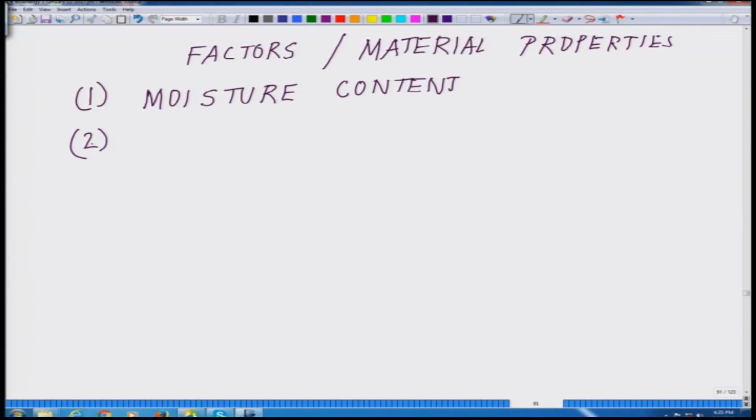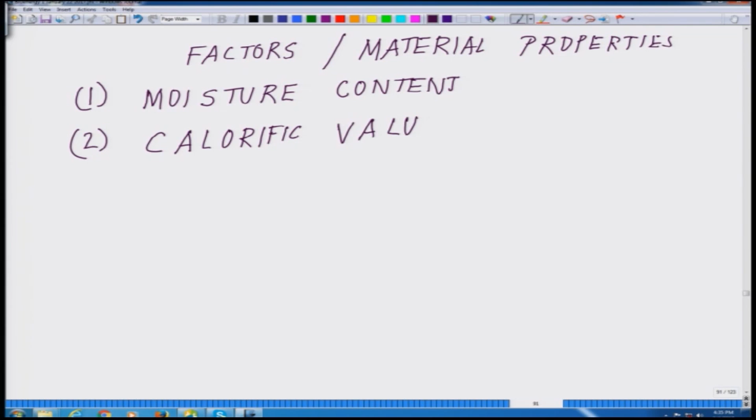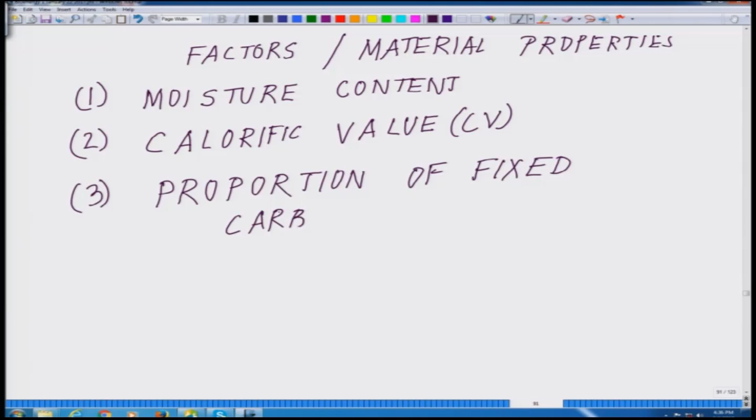Okay. As we promised, we will first enumerate all the points. Next important thing is the calorific value, which in short is also called CV. Then we have the proportion of fixed carbon versus the volatiles in any sample. Proportion of fixed carbons versus the volatiles.

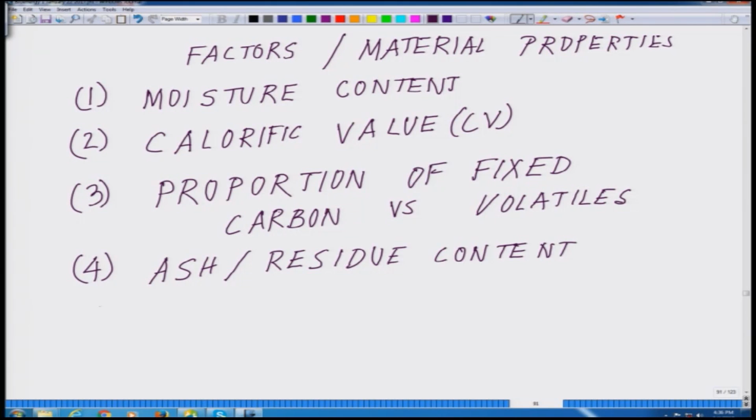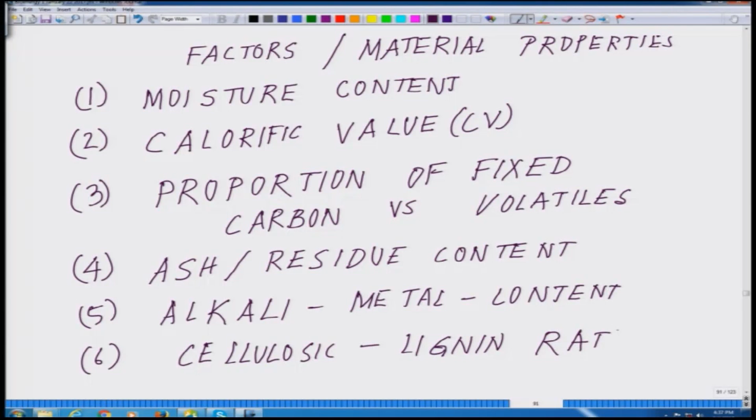Okay. Then there is a fourth factor which we call ash slash residue content. How much ash is being produced, and these are all linked to the carbon level and the volatiles content. Fifth factor is alkali metal content, and here specifically we will talk about the role of silica. And the last important feature is what we have already discussed; we will briefly try to pick up those points which we may have missed, cellulose to lignin ratio. Okay. So, these are the 6 critical features which eventually determine how much energy you can derive from the material.

So, let us get an understanding of this water content concept. What really is water content? There are 2 levels of water. One is called intrinsic water, the other one is called extrinsic water. Intrinsic water is that small amount of internal water which is inherent in the material. In other words, the material is made up of proteins, carbohydrates, lipids. In between them there are a lot of water molecules which wobble around them, and it is that minimum amount of water that helps these biomolecules to function. So, that is called the intrinsic water.

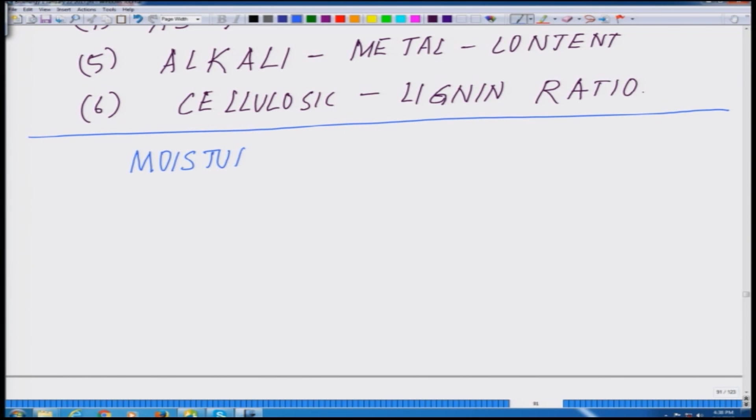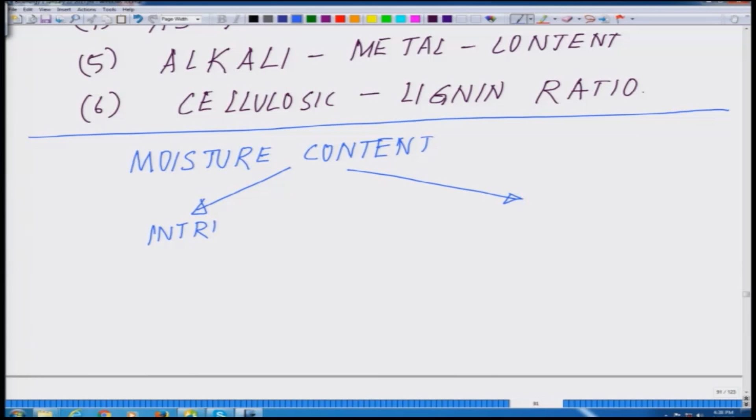So, let us get back to the slide and start jotting down those points. Now what we will be talking about is the water, moisture content or water content. Moisture content falls under two headings. The first one is intrinsic, the other one is extrinsic. Intrinsic water has no influence from the weather condition. That bare minimum of water is essential for that biomolecule or for that system to function.

Contrary to that, there is something called extrinsic water. Extrinsic water is a function of the environment. Say for example, you are harvesting a crop in the Kharif season or in the rainy season. In those seasons, the crops will have more water in them. Or when you have harvested the crop, there is a rainfall. They may pick up that moisture, and moisture plays a role in determining what kind of conversion strategy we have to follow.

You must recall a couple of lectures before, we talked about it, that there are certain plants which, because of higher moisture content, could only be processed by fermentation or the biochemical route. Whereas at a lesser water content, you can use the direct heating technique or chemical degradation techniques, but that solely depends on the water content.

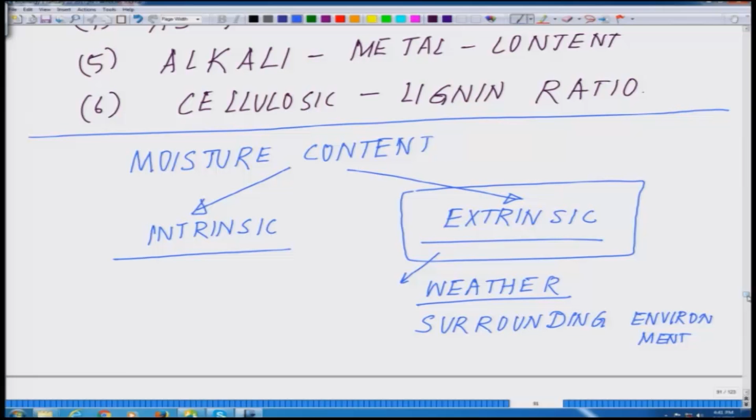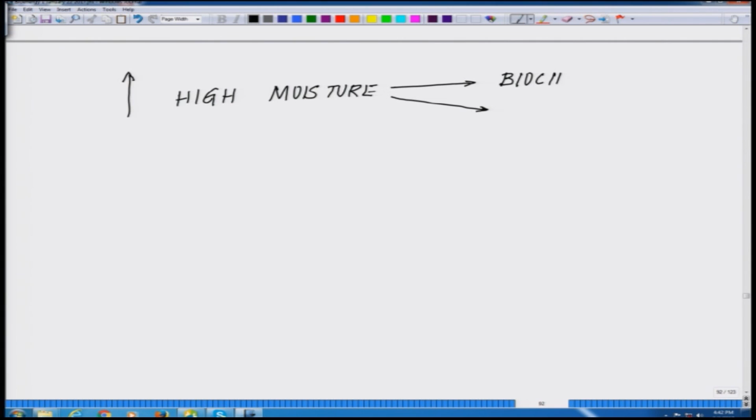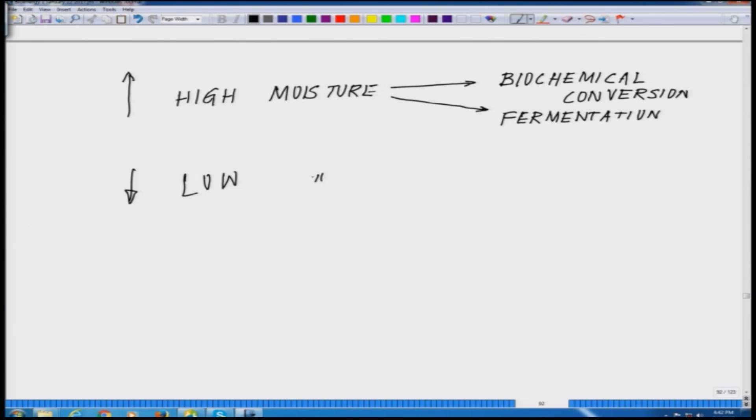Now, I will draw a table for you as an example to understand this fact. But before I put the table, there is something I mentioned which I wanted to highlight here. Say you have a high moisture sample. This high moisture sample is generally suitable for conversion either through the biochemical conversion route or the fermentation route. Contrary to that, if you have a low moisture content, such a sample goes through a thermal route.

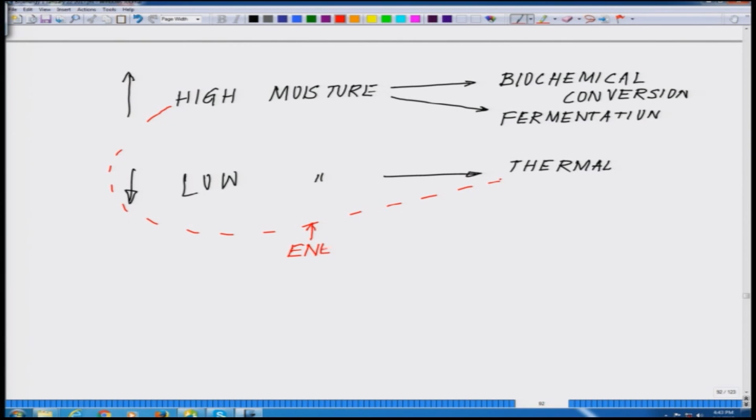That does not mean that you cannot use a high moisture sample for the thermal route. Of course you can do so, but the energy consumption here will be fairly high. Energy expenses will be prohibitive. In other words, you will have to spend a whole lot more energy to transform a high moisture sample by the thermal conversion route. Once we come to the classification of different conversion routes, it will be clear to you, but from your basic understanding you can visualize that it has more water, so you may prefer to go through a fermentation route where it converts into alcohol and so on. So this is the energy expensive, prohibitive route.

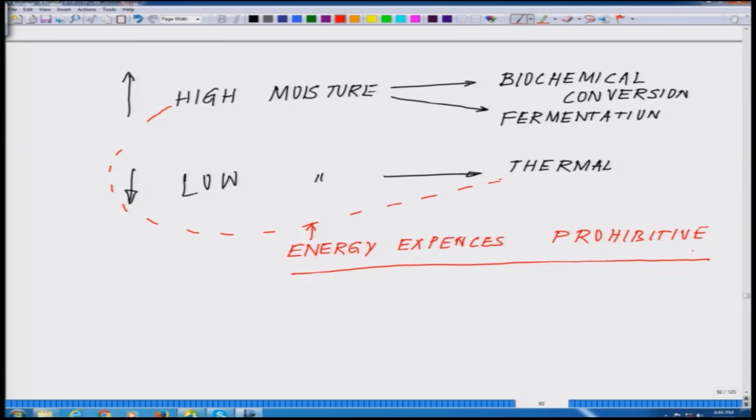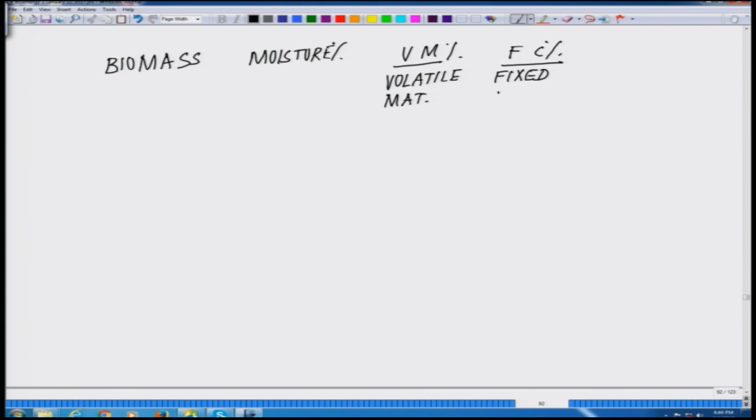Now, I was talking to you about the table. So let us draw tables for your better understanding. You have the biomass. We put the columns: moisture percentage, then the volatile material, VM, and just put MAT for material. Then you have FC percentage. Please get used to these terminologies. It is called fixed carbon percentage. Then you have ash percentage.

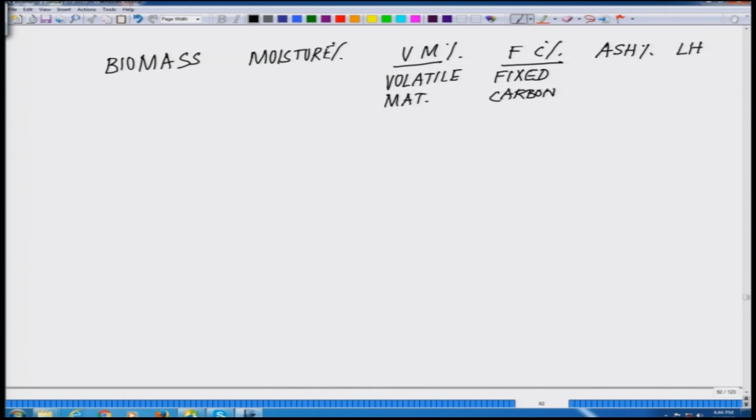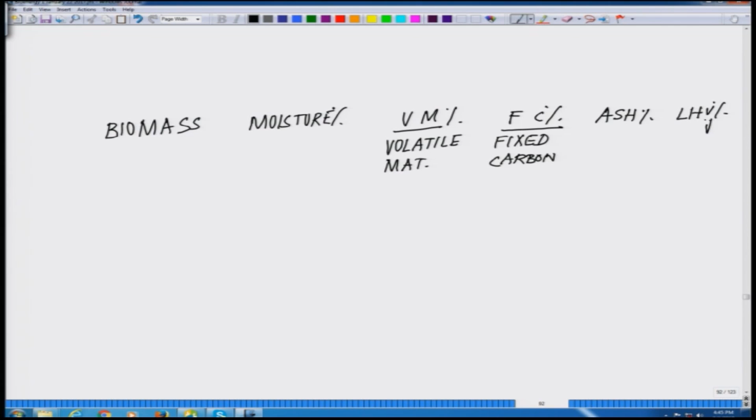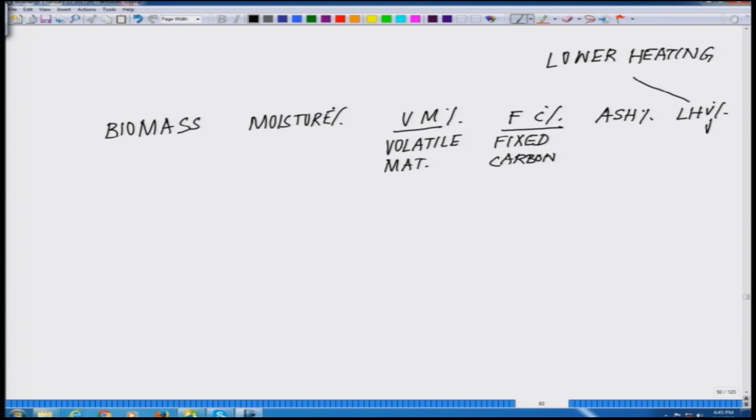And then there is another terminology which will come next, in the calorific value, which is called LHV percentage. LHV is lower heating value. We will come to that: what is the meaning of lower heating value, what is fixed carbon, and all those things. Now, let us do a comparison, and this table will come in very handy in the calorific value. Say we compare wood and wheat straw.

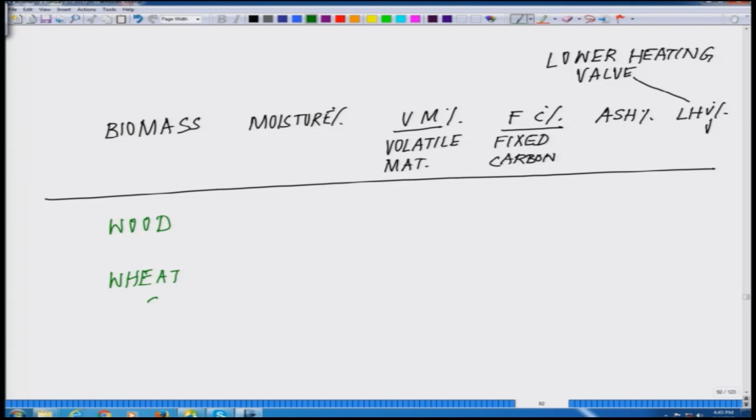So, what you will see is that in the wood essentially there will be 20% moisture, whereas in the wheat straw you will have 16% moisture. So, the first comparison. In terms of volatile matter, see the difference. 82% volatile material, whereas in the wheat you have only 59% volatile material. Contrary to it, fixed carbon here is 17%, whereas fixed carbon here is 21%. Okay? And the ash is 1%, whereas here ash is 4%, and lower heating value is 18.6, whereas 17.3.

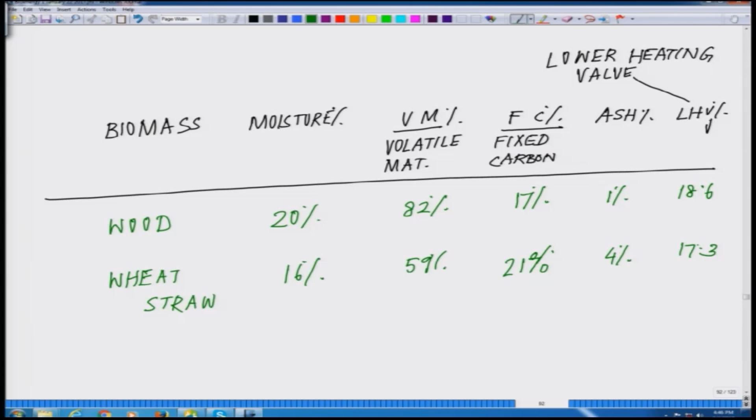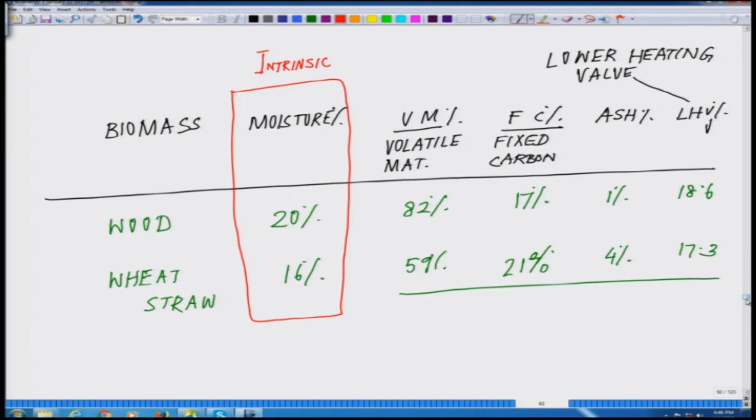Just at this stage, do not worry about this part of the table. Just concentrate out here. This value is very critical, and this value, what is being reported in any literature, is intrinsic value. So, always remember these kind of tables, when they talk about the intrinsic value, they do not talk about the extrinsic value. Okay? So, that is the reason why I put that table in front of you.

Now, coming back, so this is what all you needed to know about the water content. After the water content, we will talk about the calorific value, the phase 2 of it. So, this is the second parameter which is very important for us. So, coming back to the slide, so this is B, which is our calorific value, which is also, as I told you, denoted by CV, calorific value.

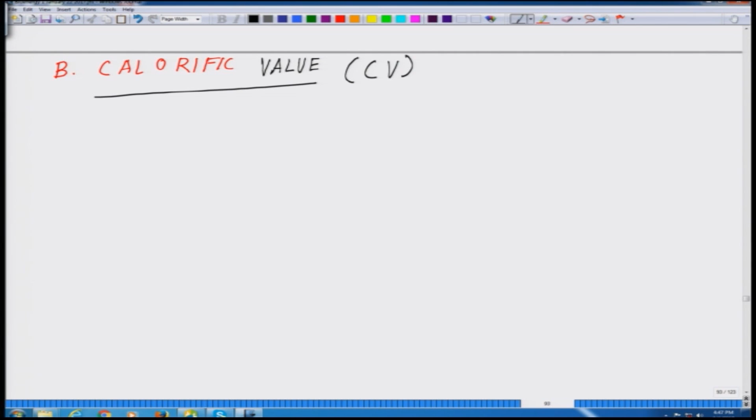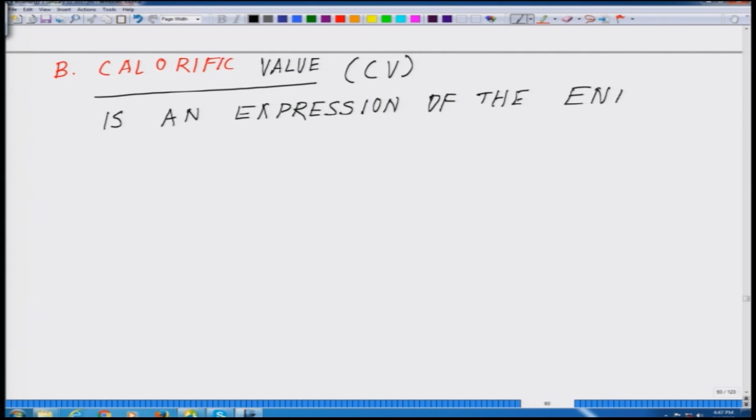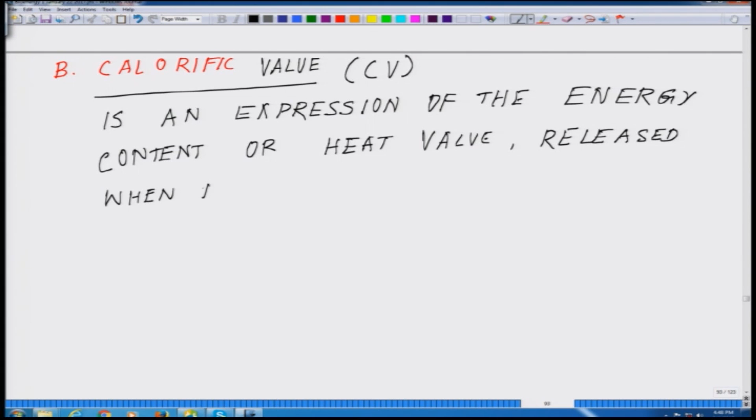So, calorific value is an expression of the energy content, or it is also a heat value, since it is in calorie, heat value released when burnt in air. When burnt in air. So, this is another part to remember when you are burning it in air.

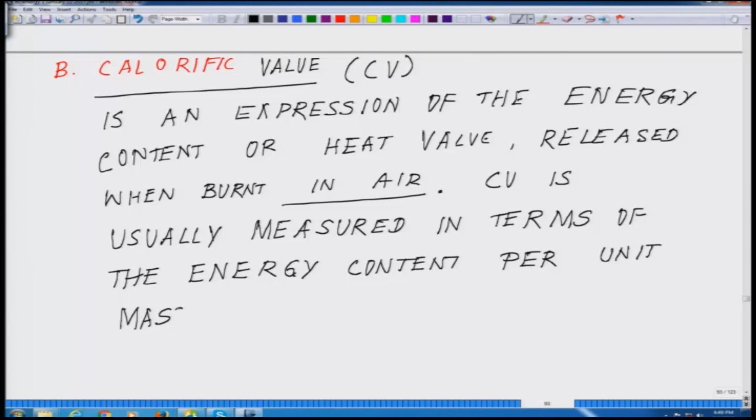CV is usually measured in terms of, now you remember in the very first class, the first phase of the lectures, I told you about all the units which will be essential, in terms of the energy content per unit mass, or sometimes volume, because when you are calculating it for any kind of liquid.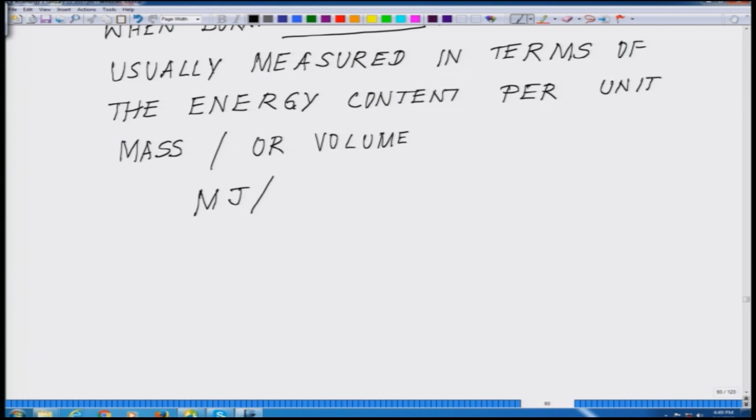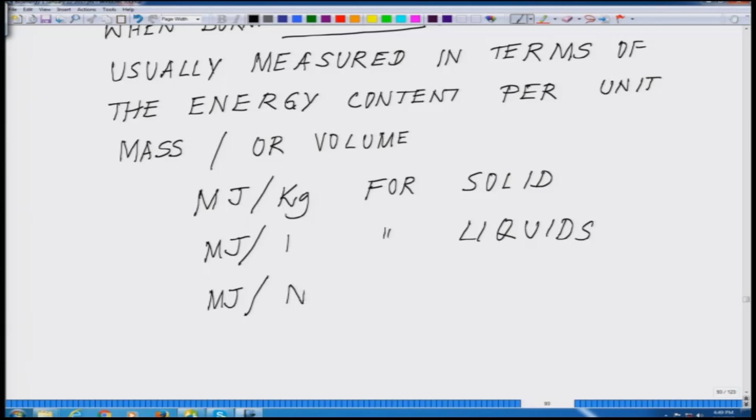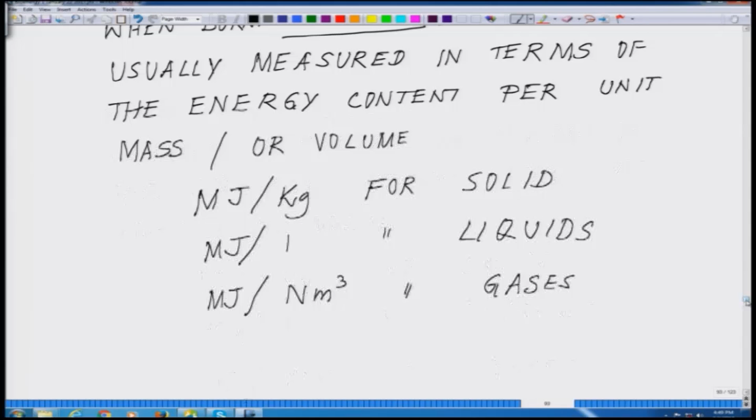Hence, the unit is megajoule per kilogram for solid, megajoule per liter for liquids, and megajoule per normal meter cube for gases. So, this is the unit which is being used, and CV can be expressed in two ways. Just like water content, intrinsic and extrinsic, CV can be expressed in two processes. One is called gross calorific value, GCV.

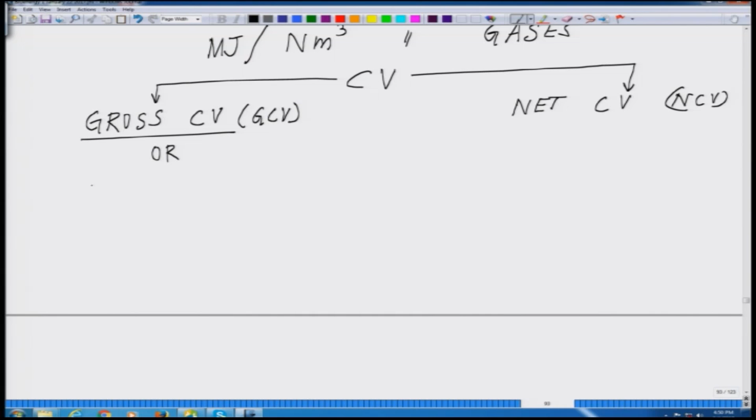The other one is called net CV, NCV. Gross is also called higher heating value, HHV, whereas the net calorific value is also called lower. Now, you remember where this word came from, lower heating value, LHV. Now, what is the difference between the two?

So, to explain you the difference, it is something like this. Whenever we calculate the calorific value, we take into account the latent heat of the water vapor. What does that mean? Say for example, I have a sample, and I want to measure the calorific value of this stuff. So, there are a lot of water molecules inside it, right.

So, if you remember, in the last class I was telling, what are we really deriving? We are deriving the breaking of the bonds between carbon, hydrogen, oxygen, and so on and so forth. Wherever there is a bond, we are breaking the bond. While we are breaking the bond, we are pulling two things apart. It is liberating an energy, and that is the energy what we are using, right.

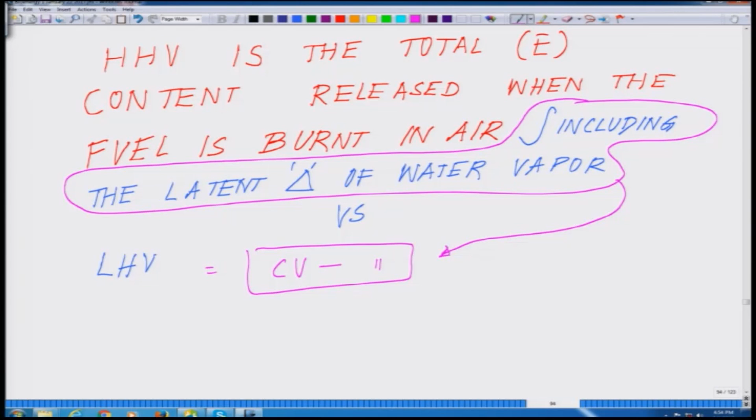Now, latent heat, I am just putting as a triangle, of water vapor. Now, versus when we talk about the next one, which is lower heating value, what you are getting rid of in the lower heating value is this part. This is the part which is not included in the lower heating value. Okay. So, calorific value minus the latent heat is what makes it the lower heating value. So, essentially this is the more practical term, more practically used for all this kind of situation. Okay.

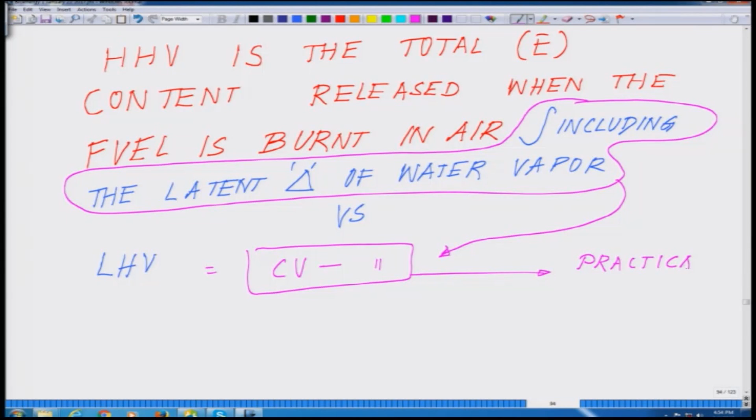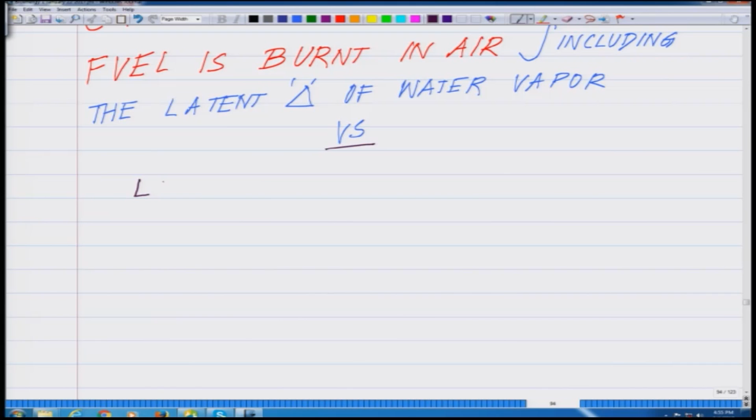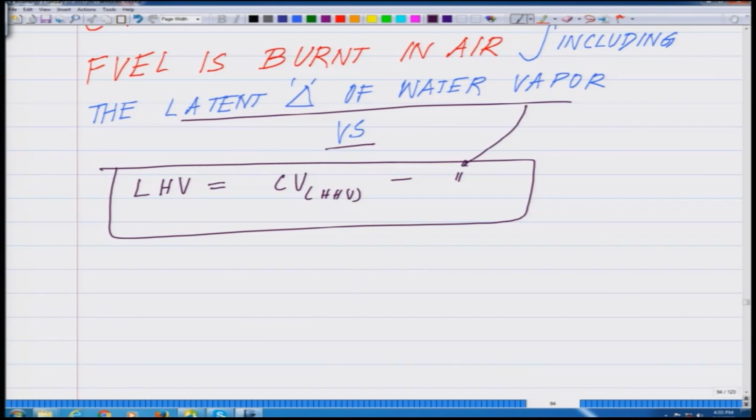Your LHV is equal to the CV, which is calculated for HHV, higher heating value, minus this value. Okay. And this is what is more practically used. So, wherever you see HHV, LHV, do not get confused, because it is a very simple concept. So, I believe this concept is clear to you. So, you are removing the water vapor, and then what you are getting is the real value.

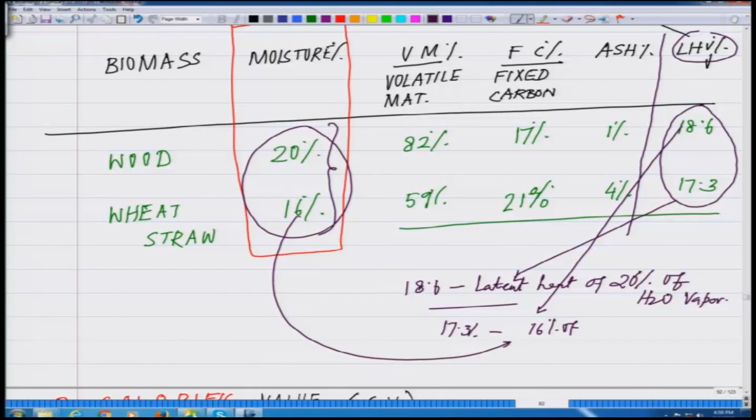Okay. So what we realize is that from the gross calorific value GCV, you have to remove the percentage latent heat given out by the water vapor. That value has to be reduced, and then what you get is the LHV value. So that was one small mistake I did, because I didn't keep an eye that that was an LHV value. So if it would have been an HHV value, or the gross calorific value, then from the gross value you have to remove the latent heat of the water vapor. If you remove that, you get the net calorific value, which is also called LHV, lower heating value. So these are the first two concepts.

Next we will go to the other four concepts, which will include the proportion of the fixed carbon versus the volatile. This will be the next one we will be dealing with, followed by the ash residue content and the alkali metal, and we have already discussed part of it.